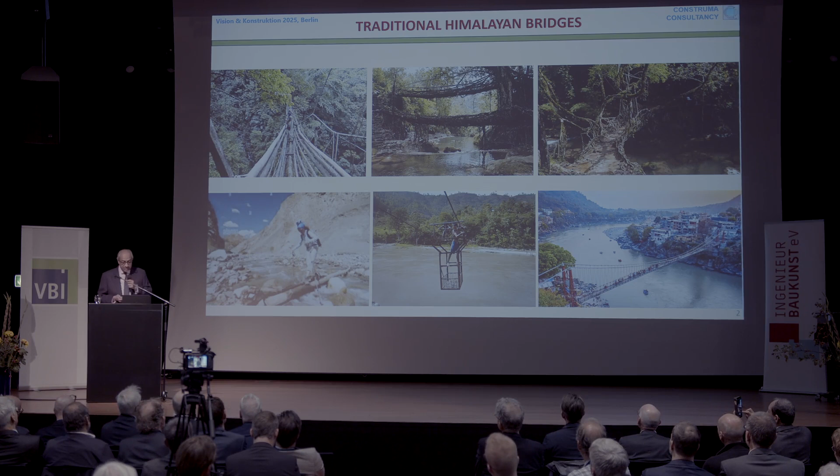Yes, so you see here some of the traditional Himalayan bridges. The one on the top is the Living Roots Bridge, roots that have been stitched together to form a bridge; on the top right, a passage crossing a simple Himalayan log; and what we call a tar in the middle, which is a wire, a pulley system by which you pull yourself across in a basket; and of course the well-known suspension bridge.

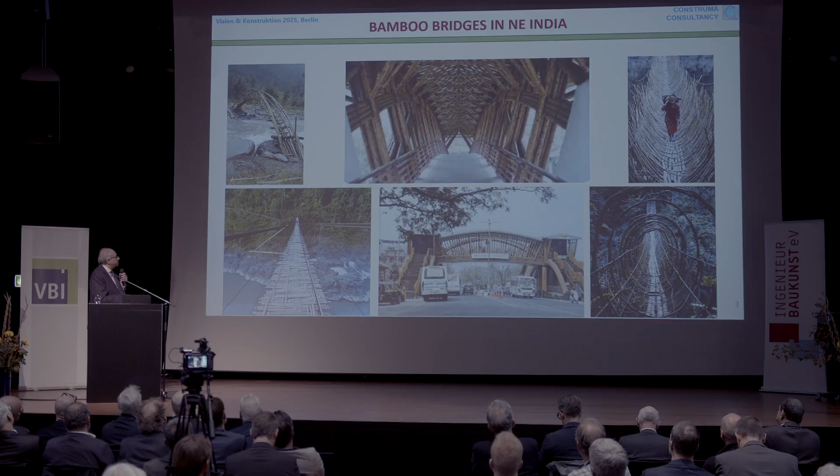Using appropriate technology is very important. There is lots of bamboo and varieties of bamboo in the northeast of India, and you see some expressions of beautiful bridges from the northeast. Mumbai, the city in which I live, has this wonderful Worli-Bandra sea link. It's a sea link, mind you, offshore.

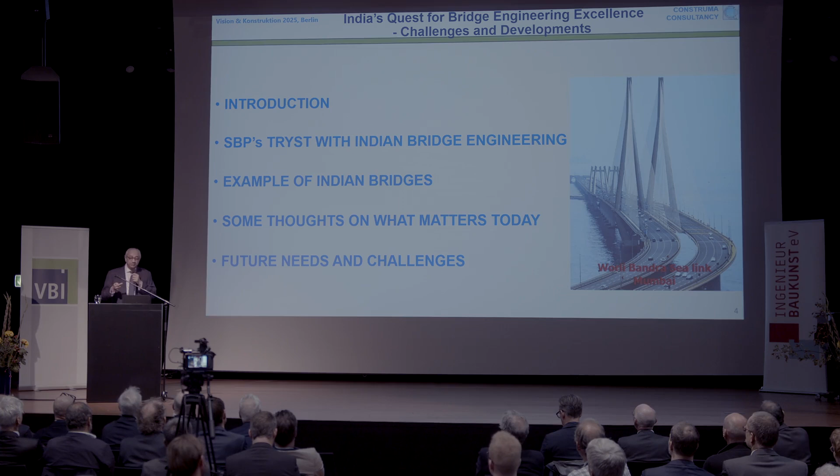And my presentation will focus on a small introduction, SBP's tryst with Indian bridge engineering, that's Schlaich Bergermann Partner, examples of Indian bridges, which I'll rapidly push through, and some thoughts on what matters today and future needs and challenges. So infrastructure is not about concrete and steel, but about improving people's lives and creating opportunities for growth. And this is where India finds itself today.

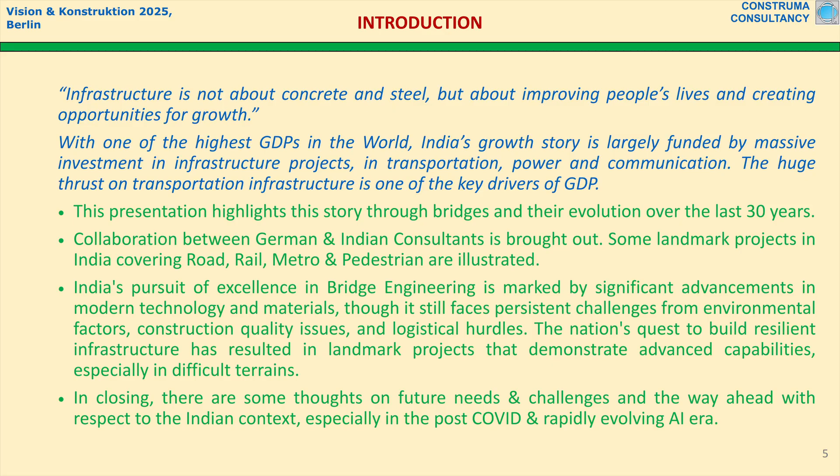With one of the highest GDPs in the world, India's growth story is largely funded by massive investments in infrastructure projects in transportation, power, and communication. The huge thrust on transportation infrastructure is one of the key drivers of GDP of the nation.

So in this presentation, I will speak about collaboration with German and Indian consultants, some landmark projects covering road, metro, and pedestrian, and India's pursuit of excellence by its significant achievement in modern technology and materials, which give it a lot of confidence going forward. Though we face many other issues like environmental issues, construction quality issues, and logistic hurdles, India is a complex country. It's so huge.

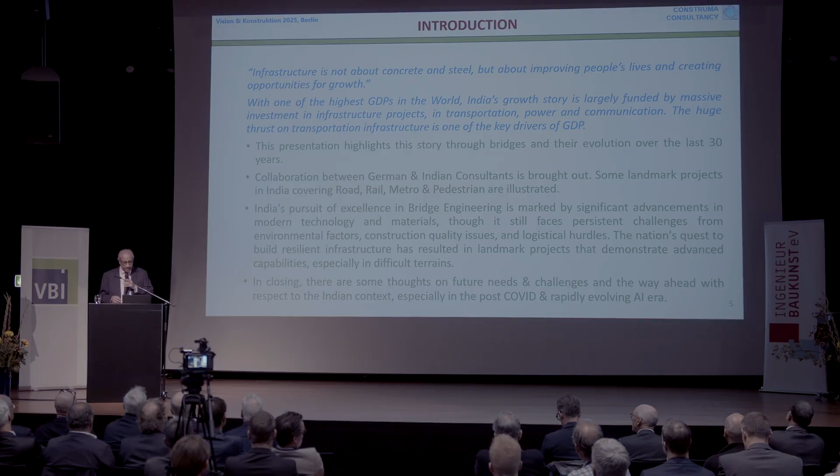It has a long coastline. It has the high Himalaya. It has the Indo-Gangetic Plain with foundations being very, very deep, and a complex terrain, complex geography all across the Indian continent. So how to build resilient infrastructure in these days of climate change is taking a very important turn for us today. And in closing, I have some thoughts on the post-COVID context and the rapidly evolving AI era.

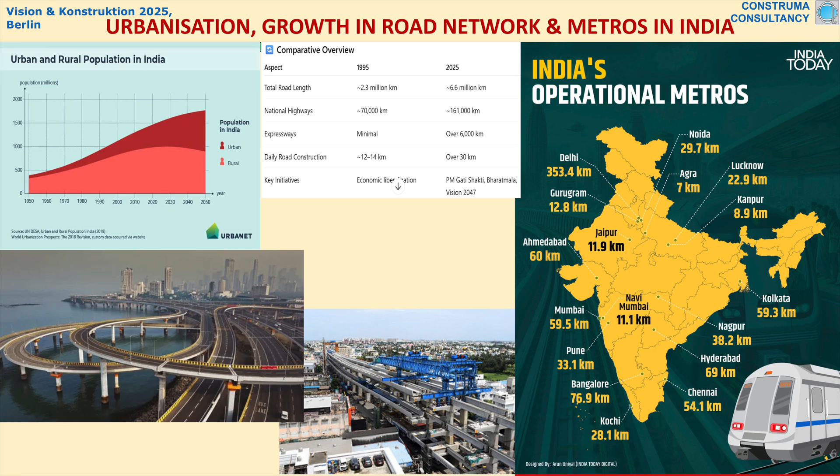Urbanization is a huge thing in India. You can see on the top left the increased urban population versus the rural falling off. And we're talking about the largest population in the world, of course, in my country. And you can see the huge road building program in the middle, where in the last 30 years, from 70,000 kilometers, we've reached 161,000 kilometers and growing at the rate of 30 kilometers of road added every day through various government programs. 22 cities have metros.

In my own city of Mumbai and Greater Mumbai, I have 26 metro constructions, of which 6 are about to start in the coming few months. So 20 are under construction.

And you see on the bottom, since it's urban congestion, there's so much congested corridor, you don't have enough road width, so either you go out to sea. So we have a whole sea link and a whole coastal road, what we call in Mumbai, to take the pressure off the existing road network and put it out to sea, signal-free, to reach up to 60 kilometers, 70 kilometers along the sea without any signal in the current planning. Of course, it means a lot for sustainability, low carbon footprint.

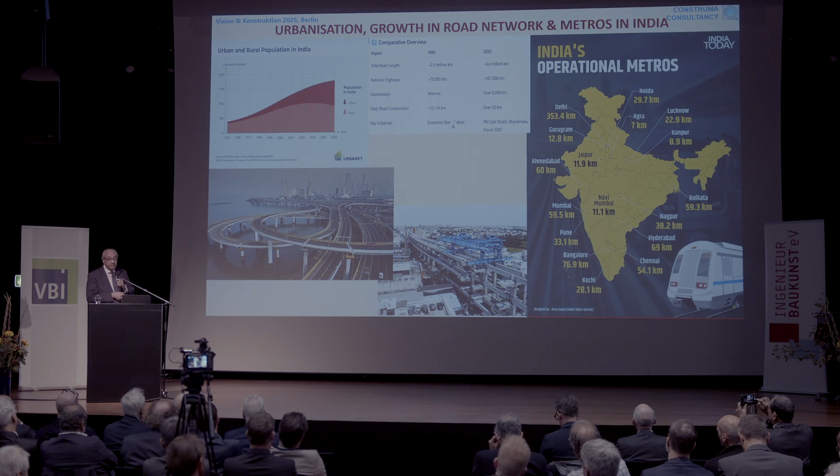And you see here in Chennai, a city in the southern part of India, where you have a double-decker construction. The metro is actually double-decker, it's level 2, and an additional road is at level 1. And so you have double-decker on an existing road in the city, simply because these are cities which exist, and there's no space, so you just go double-decker. And there's so many double-decker constructions in India at the moment: metro and road, road on road, and so on, 2-level.

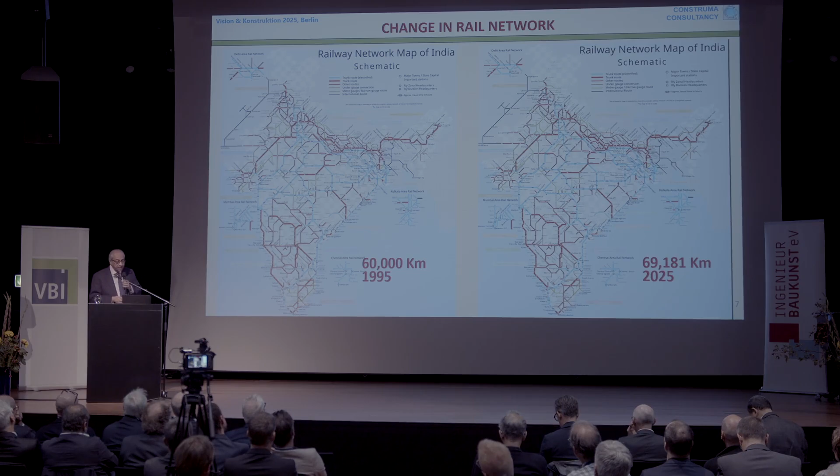The road network was one part. The rail network has hardly added about 10,000 kilometers in the last 30 years, but it's in difficult terrain. What was easy to have been done had been done. Now we're doing the really challenging ones, and this is taking a huge amount of effort and energy.

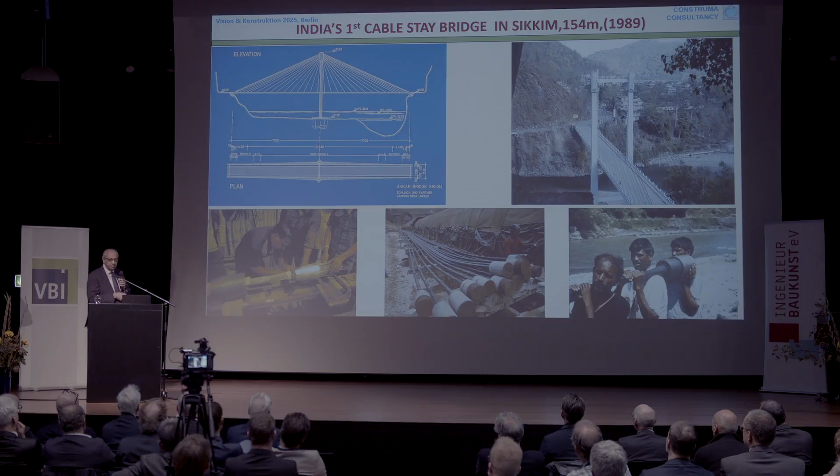And this place had no roads at that time, very narrow roads, and you could not take lorries there. So the cables were actually wound at site. The parallel strands were wound at site. The taping was done at site, where you can see them doing the greasing and all the taping, and I'm happy to tell you that this bridge is still in use and in very good condition. So that's what appropriate, Bauhaus thinking gave us right then. I didn't realize till I heard the lectures yesterday the importance of thinking in this concept of Bauhaus, but maybe it came naturally to Jörg and my father at that time. My father was a contractor for that bridge.

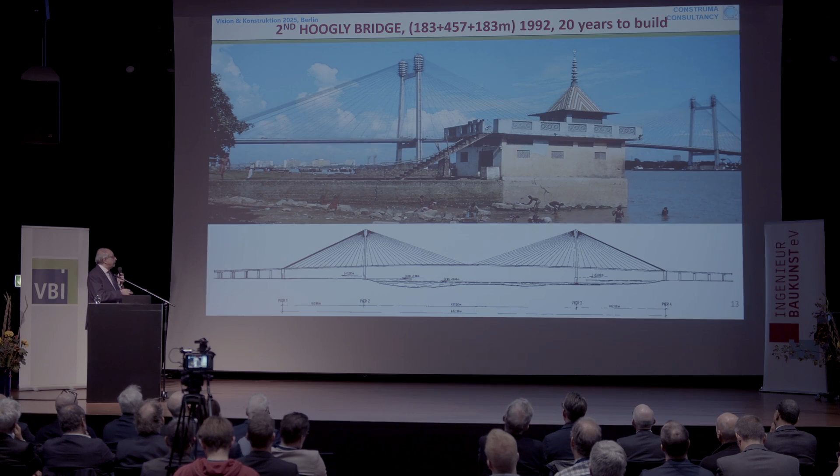And the Calcutta city in which this is one of the landmarks and icons and very much loved. So it's a 457-meter main span, and it set the concept in the entire world. For the first time, the ladder construction was created, and you see the edge beams and maybe a secondary middle longitudinal beam, and the ladder construction was developed by which you could build above the water, and you could put in concrete, either cast in situ or precast concrete decking, and create a very simple bridge without having to worry too much about it.

It's a very simple, lightweight crane, which you see on the left. So you see the light triangular derrick. It's a simple derrick which was used to build this entire bridge. So this is appropriate technology for you, and identifying with what the local concept was.

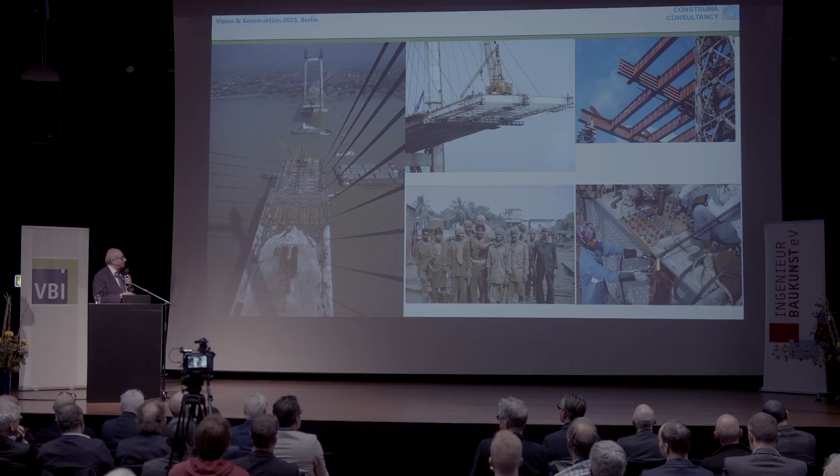No HSFG bolts existed in India at that time. The rivets were very well known. So you see in the bottom out here, rivets being used to create this bridge, and the local gang force, and these hot rivets so that we could create the joints. There's no welded joint and no HSFG bolt joint. It's riveted. Again, appropriate technology.

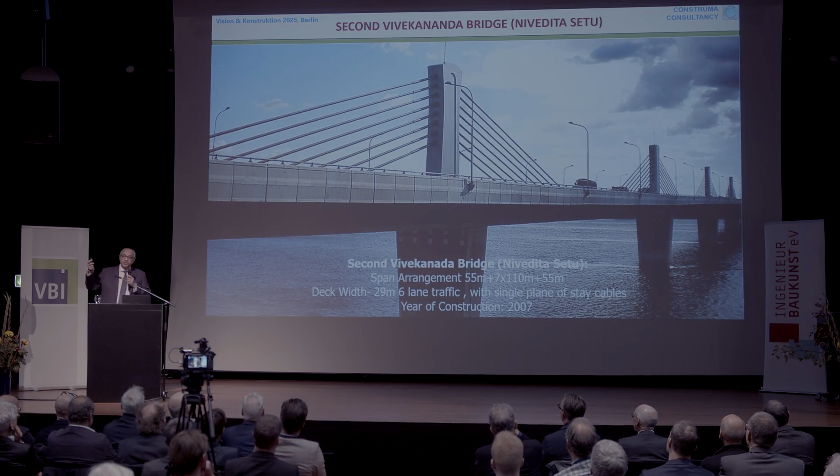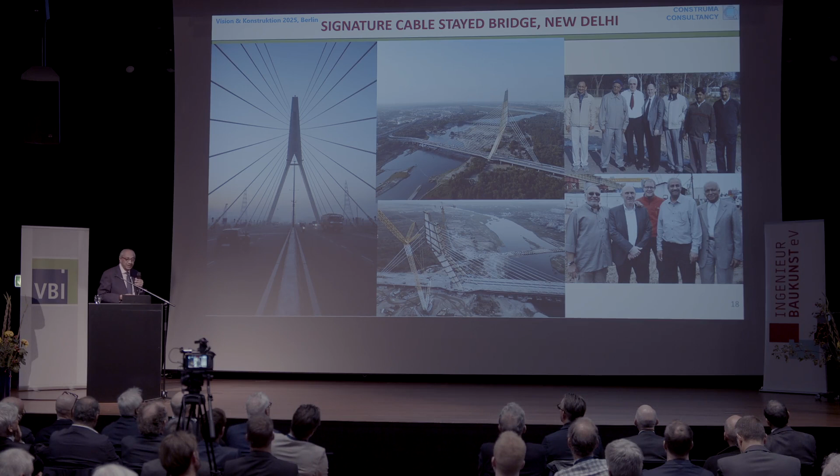And you see here the construction as it was being done, and you see the team. You see on the far left there some of the engineers from the department. You see my father, Jörg Schlaich, Mike, the engineer, Joe Skurian, and myself here. And at a later date, here you might recognize Matthias Widmer and the architect, Ratan. So this is collaboration, and this is the team. And the project was built, commissioned, and is very much in use. It has many, many achievements, and it gave confidence.

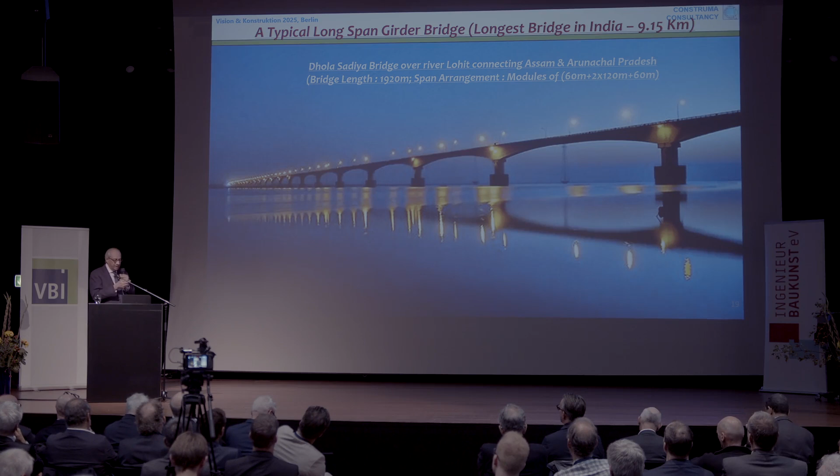These three bridges tell us a story about transfer of technology, tell us a story about two families, and tell us a story about benchmarking India's achievement over time, and developing the most modern bridge is where I last left it. These bridges are very common.

The balanced cantilever with its drooping problem with creep and shrinkage being overcome with the modern day central hinge, rather than that plunger hinge. The central hinge is an isostatic structure, typically 2-span, 3-span continuous, then a hinge in the webs. And those hinges have been specially developed, and our understanding of creep, shrinkage, and the drooping of this family of bridges have been overcome with modern tools and techniques, and of course, understanding of material behavior over time. And we have modules like this stretching.

We have 214 bridges built or under construction, and 26 more are being added by the end of this year to bidding stage. So you can imagine the rate, from where we were and where we have now gained our confidence, and many Indian bridge engineers today are able to do these quite easily, which happened over time with the transfer of technology from foreign consultants and foreign contractors. And we absorbed that, and we learned, and we improved, and we go ahead now.

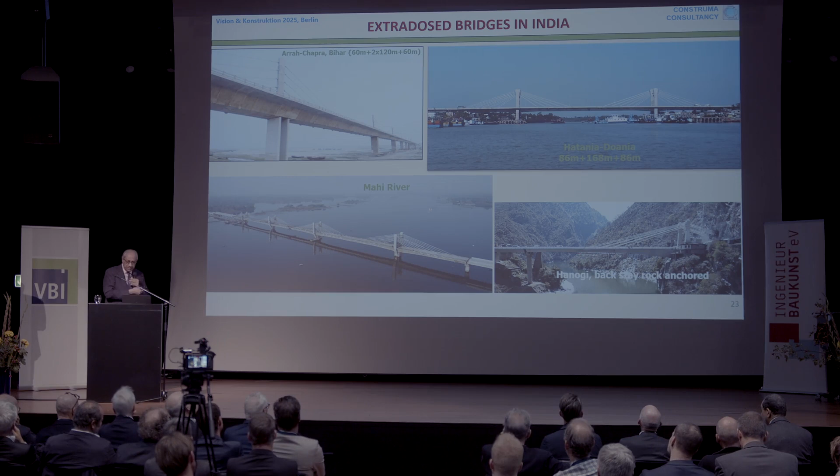So we took a cable stay bridge, put a pier there, took a simple, extradosed bridge with a short tower, and we kept the rock anchored cables at the back so that the vehicles can turn below it and go across. So these are ways in which we need to innovate in such difficult terrain and complex geology.

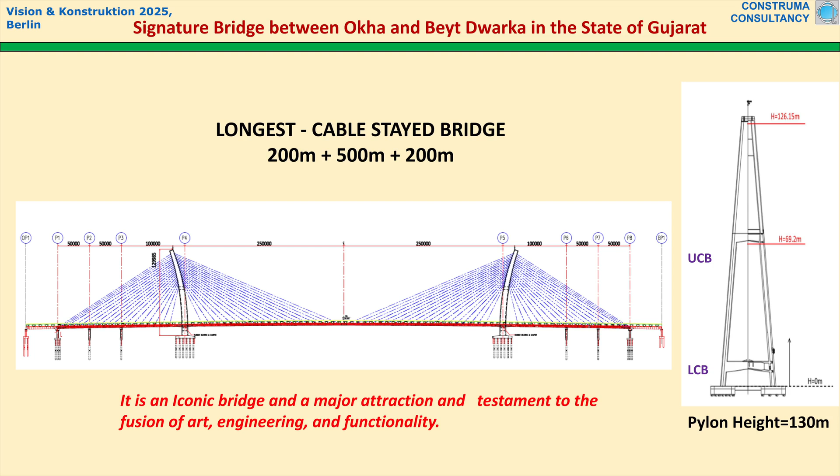So that's the bridge. It joins a temple on the other side. There's a huge pilgrimage, so the walkways are very important. The walkways are covered canopies, and there are solar panels on top. The bridge gets its own electricity from that, and it powers itself, in fact. And the huge amount of pilgrims that happen in the annual season are a key feature of this bridge.

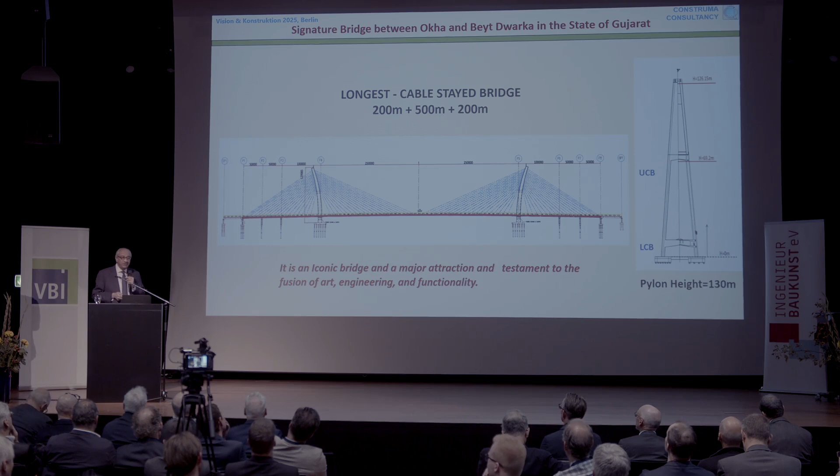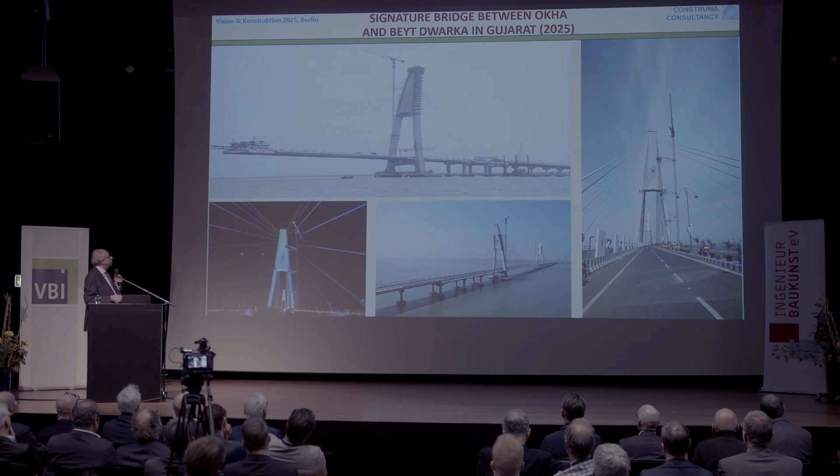And from the mainland to the Dwarka island, there was only ferries, and so many people want to go, so we made this bridge. And it has a typical peacock feather you see out there, the Indian national bird. And the lighting that you have and the beauty of this bridge when it was being constructed, you can see the peacock feather there.

Some examples of, I'll take you back. Of course, the pylon using jump form being constructed in deep water over a piled foundation. You can see the piles below at the bottom. And you see the way in which prefabricated segments were being lifted up and put into place. And again, it is ladder construction, which was invented in the second Hooghly Bridge.

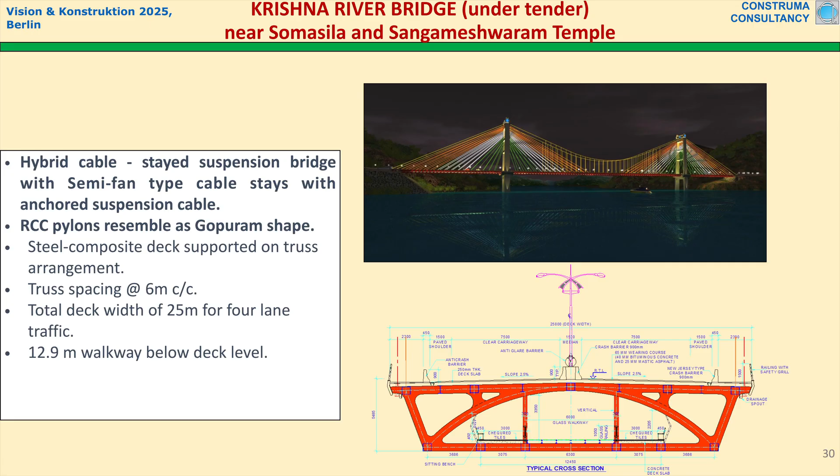A future look, a project under bidding, a hybrid suspension cum cable stay. And you have a lower deck here with the walkway, and you have glass on the other side. And these are trusses at 6-meter intervals, which are integrated longitudinally by members. And these trusses are, of course, at the points where the cables come in, and it gets its torsional stiffness and its tremendous stiffness, obviously, from these trusses interspaced at 6 meters.

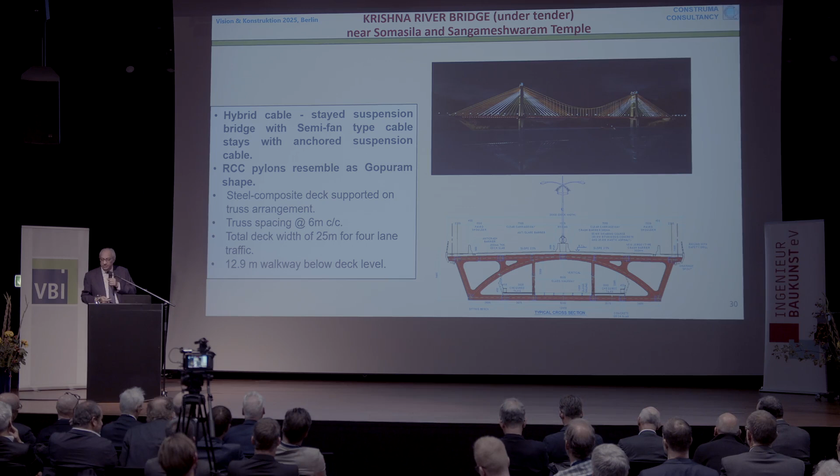It's a 2-level, again, a pedestrian bridge, and it joins 2 temples at a height. So the 2 temples are part of a pilgrimage again, and people would have to come down, go across, go up the other hill, etc., and this whole thing took 4 hours. When this is built, it will take only about 5 minutes.

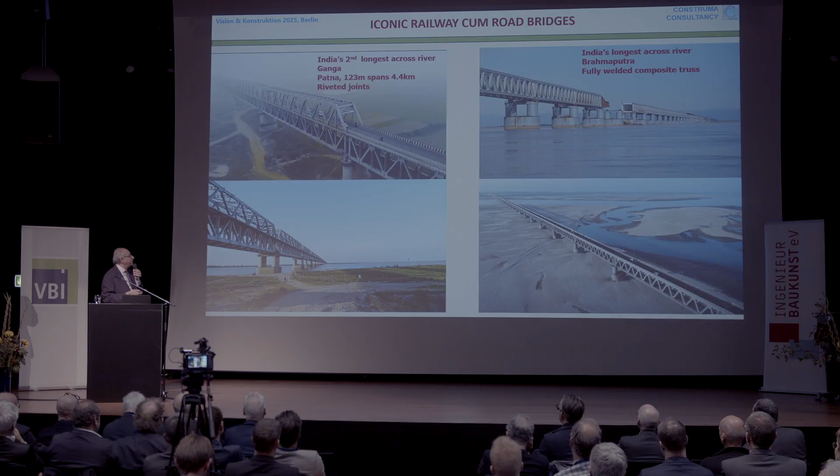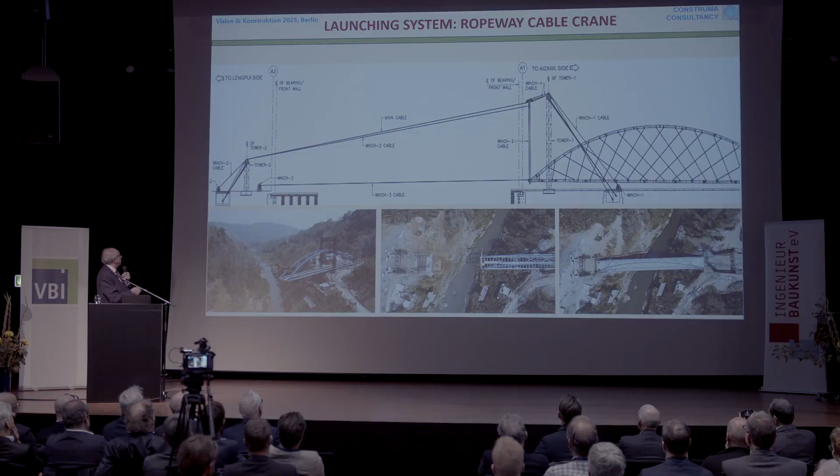Anji Khad Bridge, India's first cable-stayed bridge on the same line. And again, you see a crane being used, very difficult site conditions, to launch a bridge across using simple rope blocks and rope winches. And you see the stages, the bottom, left, right, and finally in place there. Simple technology, but very important.

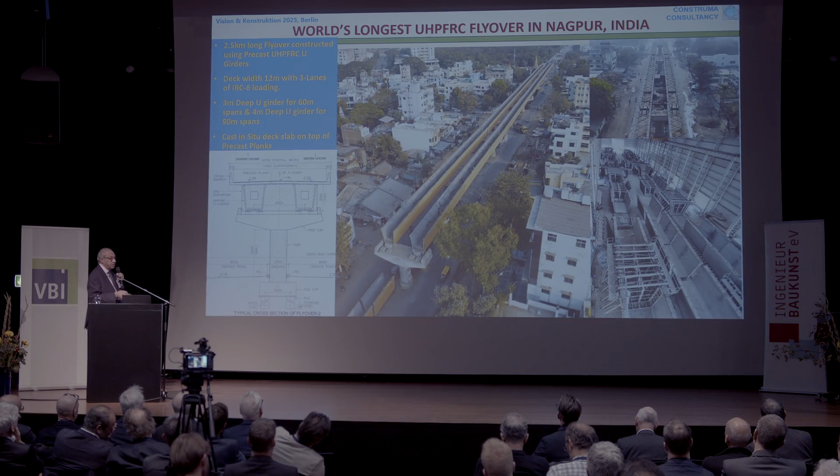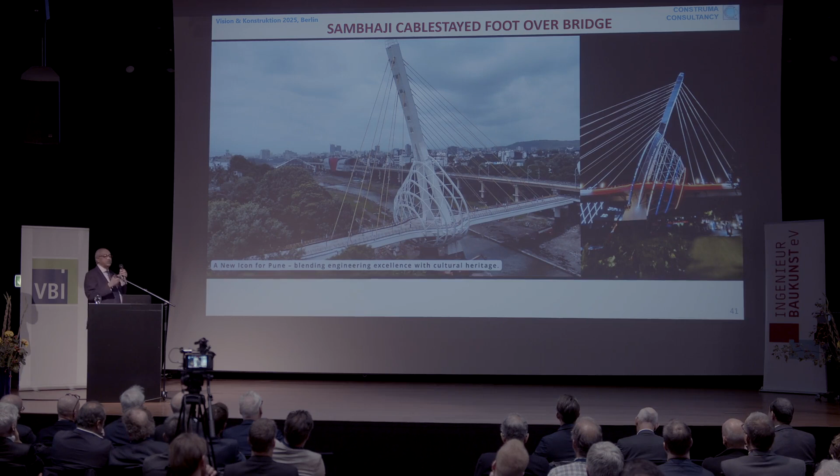And I will just quickly skip through these 12 foundations that I wanted to talk about and come to what matters most, because there is very little time.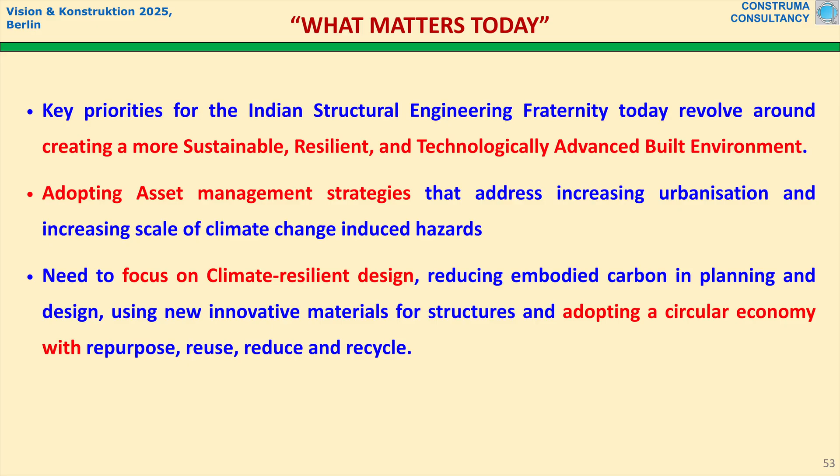So the key priorities for the Indian structural engineering fraternity today revolve around creating a more sustainable, resilient, and technologically advanced built environment. Adopting asset management strategies that address increasing urbanization and the increasing scale of climate change-induced hazards. We need to focus on climate resilient design, which is not being done at the moment. Reduce the embodied carbon in planning and design. We don't have anything yet on how to do it. And using innovative materials for structures and adopting a new circular economy with repurpose, reuse, reduce, and recycle. I just showed you a few examples of doing that.

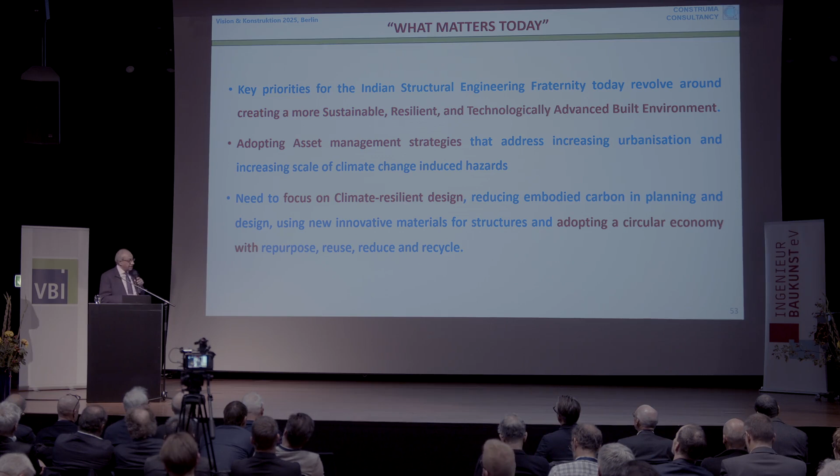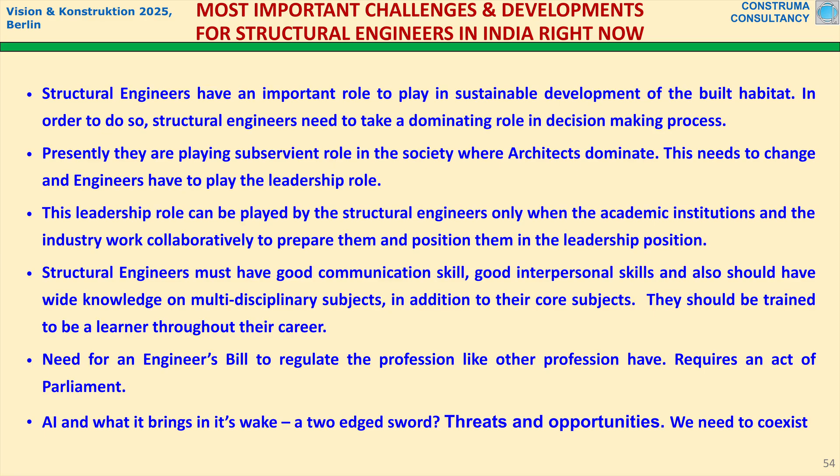And we have some challenges. Structural engineers have a very important role to play in sustainable development of the built habitat. In order to do so, structural engineers need to take a more dominating role in the decision-making process. We find ourselves not involved in policy, in the decision process. This might be a malaise in many countries, but in India it's very pronounced. Presently, Indian structural engineers are playing a subservient role to the architects who dominate. And this needs to change to become more collaborative, more cooperation between these two, in fact, between multiple disciplines.

And engineers need to, again, play a leadership role. The leadership role can be played by structural engineers only when the academic institutions and the industry work collaboratively to prepare them and position them in the leadership position. So this is lacking in our education. Structural engineers must have good communication skills, good interpersonal skills, and also have a wide knowledge of multidisciplinary subjects, as became obvious in yesterday's lecture by Mike, in addition to their core subjects. They should be trained to be learners throughout their career.

There is, in many countries, I know Ian is here. Ian, you have the engineers bill in the UK. You have a regulatory body. In India, we don't have a regulatory body for the engineering profession. This might be true in many, many countries elsewhere in the world.

So there is a crying need to get an act of parliament passed to get the Engineers Bill, which will regulate the profession of structural engineering, in fact all engineering in India, with a regulatory body.

And of course there's been talks about AI and what it brings in its wake. Is it a two-edged sword? What are the threats and opportunities? We saw that in the earlier lecture. One is, of course, becoming obsolescent. Are we going to be a nobody?

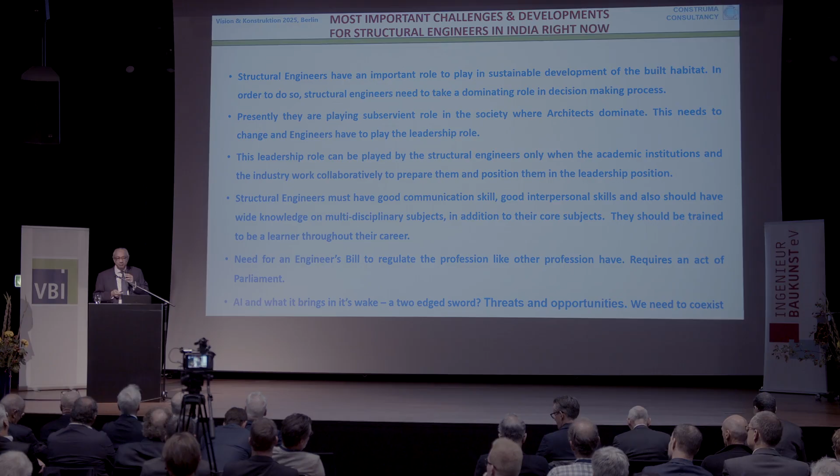We will have to coexist. There is no question about that, and we need to leverage that. Maybe it'll free up a lot of time for us to sail, mountaineer, and play golf. One can't say what the future holds. But if cleverly used, in a manner of collaboration and cooperation, much like Bauhaus thinking, I think the culture may stay, and we may have a coexistent, symbiotic living with AI. So on that note, thank you very much.

Thank you. Any questions? I have a question related to your presentation on innovative structures, and I would relate it to Professor Mike Schlaich's presentation on innovative materials, the innovative material being CFRP. So I would like to ask if CFRP has arrived among structural engineers in India.

I'll answer that question. I've done 40 bridge repairs with CFRP, and I have just written the guidelines for India with a set of colleagues from IIT Hyderabad and elsewhere, and from Russia and the UK. We've created a guideline and it will be published pretty soon. So yes, we are ahead of the guideline, and we're using it in a large way.

Also as a principal material? We use CFRP, fiber wrap, as is common elsewhere. We use CFRP wraps, and the ACI 440 and FIB 90 guidelines at the moment, but now we're developing our own. Thank you, sir. Thanks.

More questions? I thought it was kind of interesting that you showed a juxtaposition of very old technology, riveting. You said the railway is hesitant to use bolting. Why not welding? You showed some bridges with welding. How does this tradition of riveting last in India?